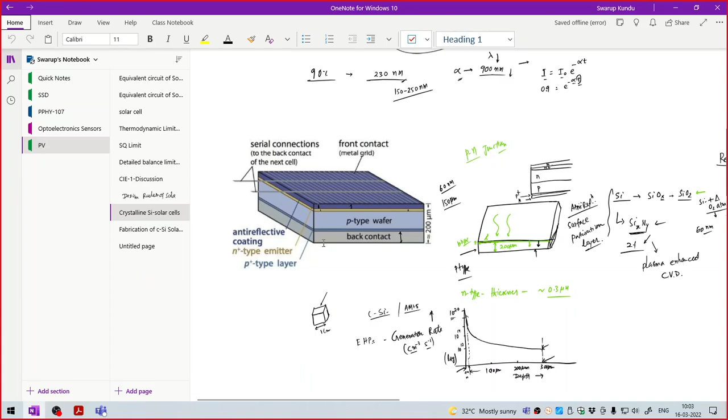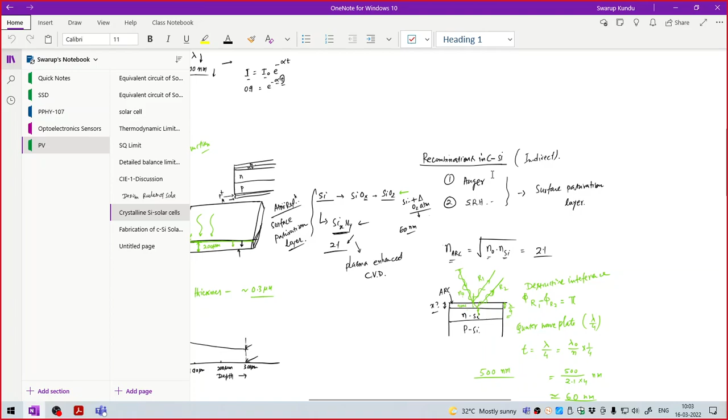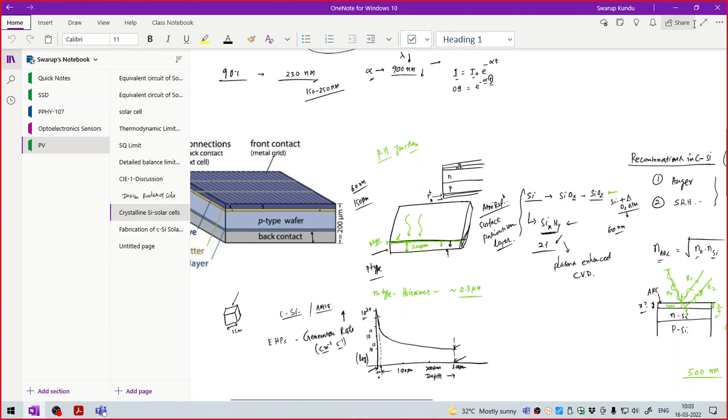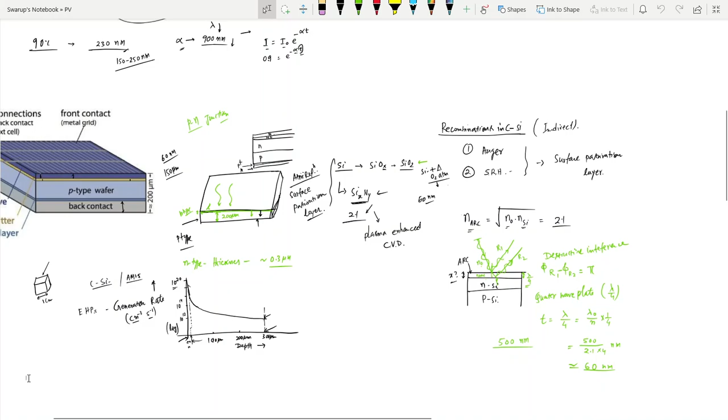In the last session, we discussed this crystalline silicon solar cell, and several concepts to increase its efficiency. We stopped at discussing the anti-reflection coating thickness and how to reduce recombination losses. We discussed this anti-reflection coating on the top, and we can use the silicon oxide layer or silicon nitride, either one for anti-reflection coating as well as surface passivation layer on the front surface. So for the front layer, until this we could optimize why we are doping N plus and the purpose of anti-reflection coatings.

Now how do we put the electrode? We discussed this earlier, but we'll quickly brush through once again what should be the optimum thickness of these bus bars and the finger bars, or the fingers. This thin metal grid. There are two types of metal grids: one is the thick bars called bus bar, which connects to the external circuit, and these fingers which collect the electrons from the wafer and send them to the bus bar. This configuration is used to minimize the shading loss.

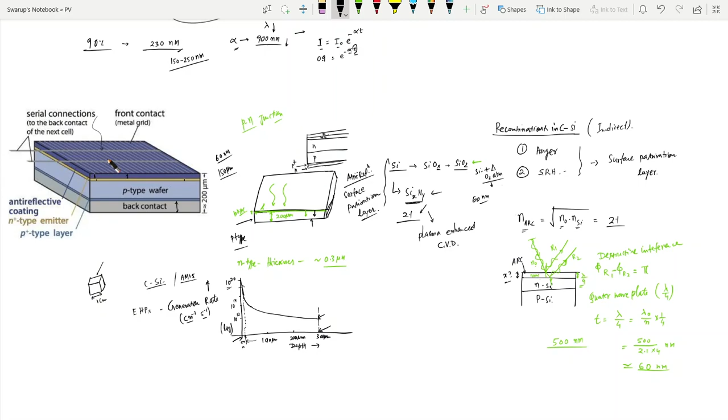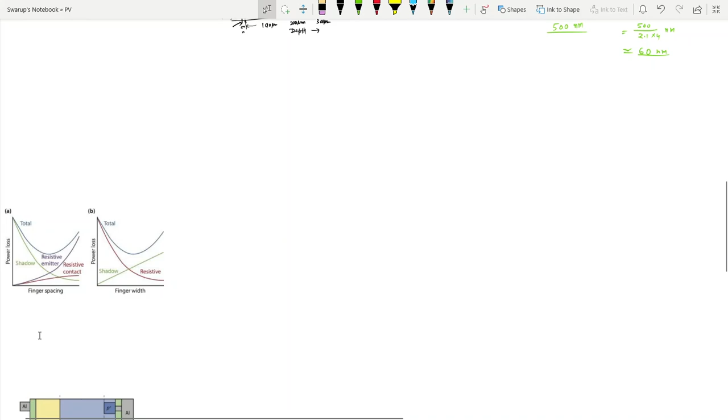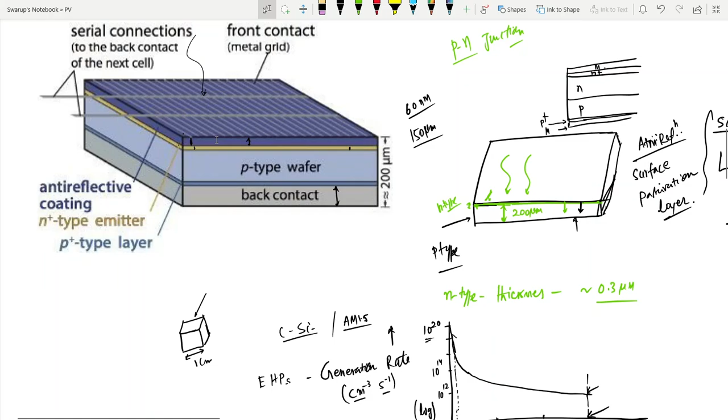Because light has to enter into the cell from this surface, the front surface, let's see this diagram. So on this front surface, there is a trade-off between the thickness of these contacts, these metal contacts or grids.

Sometimes we call the thin one the finger electrode, or fingers, and the thick one the bus bar. So there's a trade-off between the thickness of these fingers or bus bar and the shading. If you increase the finger thickness too much, we'll have a lot of shading loss, and the sunlight cannot enter. So there is a trade-off between these two.

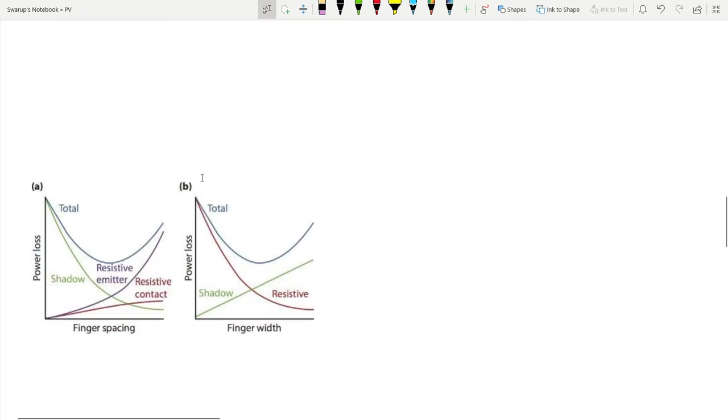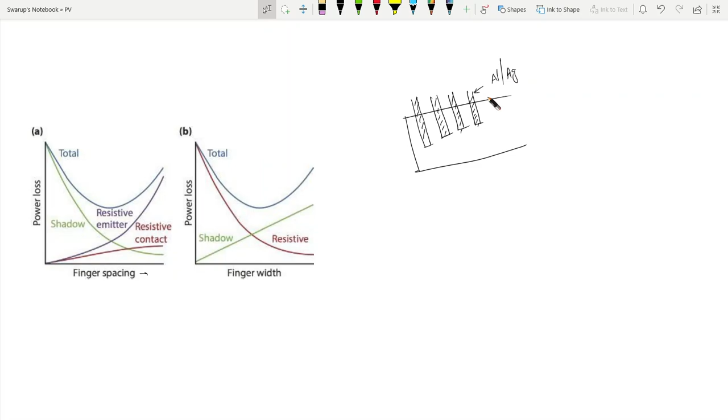Let's try to understand first the finger spacing. I'll draw the top surface of the solar cell, and I'll draw a couple of fingers to understand this. So first thing is finger spacing. These fingers are essentially made with thin metal films, generally aluminum or silver, and they are opaque to the sunlight, so they will shade the sunlight. There will be shading, so sunlight cannot enter into this region, and that's a loss for us since those photons will be lost.

So for finger spacing D, if we increase this finger spacing, our shading loss will decrease, since more sunlight can enter. In this curve we have the power loss, and shading loss is decreasing because we are increasing D. But the contact resistance with the emitter will behave differently.

This top layer is our N type, also known as the emitter. So the resistance between this emitter and the metal contact will increase, because if you increase the finger spacing, the number of fingers will be less, or the contact area between this N-type emitter and the metal will reduce. We know resistance R equals rho into L by area. So as we increase the finger spacing, the contact area reduces, and eventually our resistance will increase.

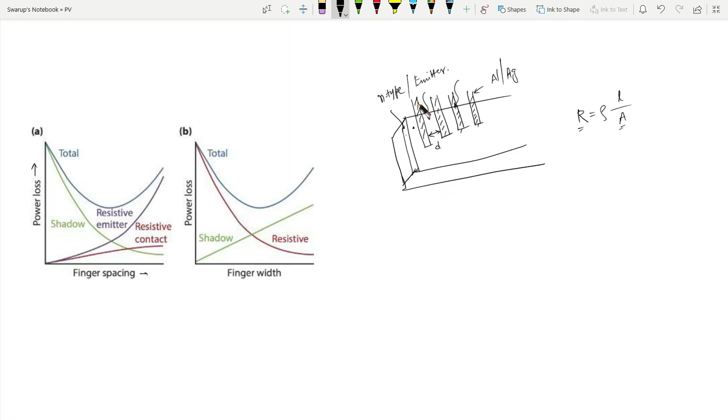And one more thing: if you go for very thin fingers, then also... but let's finish this point first, and the next one will come.

So if you increase the finger spacing, the contact area between this emitter and the metal is reducing. So if you increase D, the contact area decreases, so the R increases, and we'll have a very resistive contact. This line indicates the resistive emitter, that is the emitter resistance is increasing, and because of that the overall power loss is increasing. So we are losing more and more carriers, or overall the electrical power and efficiency will reduce.

The contact resistance is increasing, as you can see in this curve. If contact resistance increases, this resistance falls in series with the solar cell equivalent circuit, which we have seen before. Now when we try to operate the solar cell, there will be a voltage drop in the series resistance, which gives us lower VOC, lower output, lower efficiency. There is a trade-off between these two.

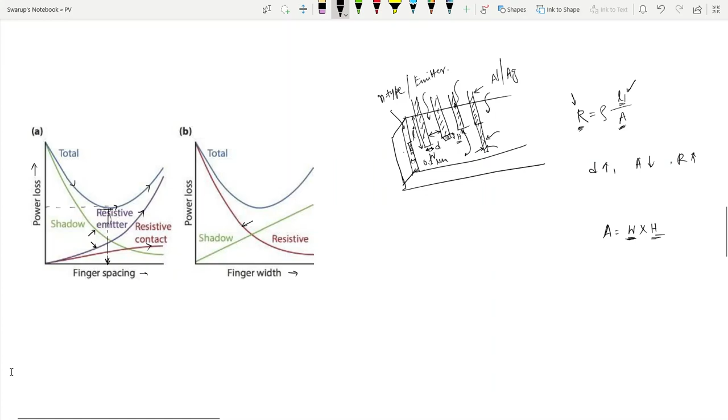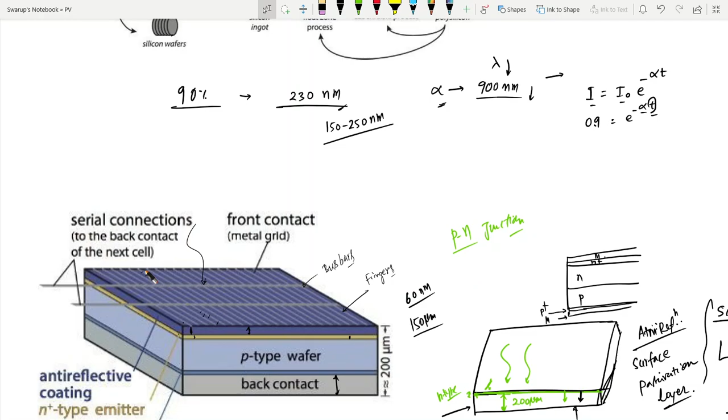So this L also you cannot play with much, and if you see this L, it is spaced throughout the solar cell, because we need to collect the electrons from everywhere, all the places. So it has to be that way, L we cannot play with.

So what is happening here? If you increase the finger width, of course resistance is decreasing, so this loss is reducing, but shadow is increasing. So if you combine these two, there is an optimum condition here, and we can get the optimum finger width somewhere here.

So in design perspective, these two numbers are very important. Later we'll see how we draw these or make these contacts, or how we pattern these electrodes on the top. Usually we use the screen printing technique.

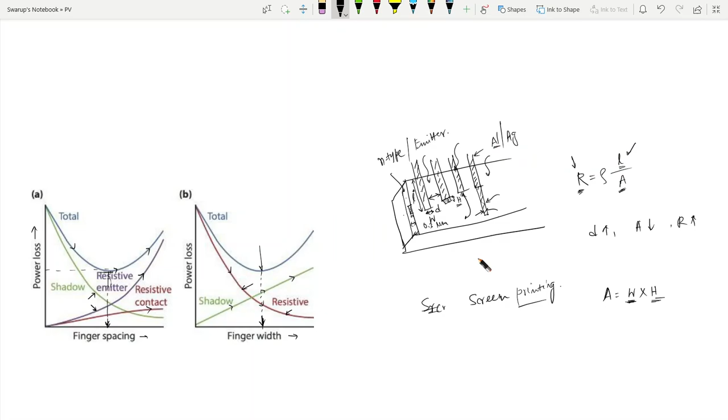Screen printing technique. So we use silver paste or aluminum paste and then do a screen printing. I'll come to more details about it later on. This is a much cheaper way.

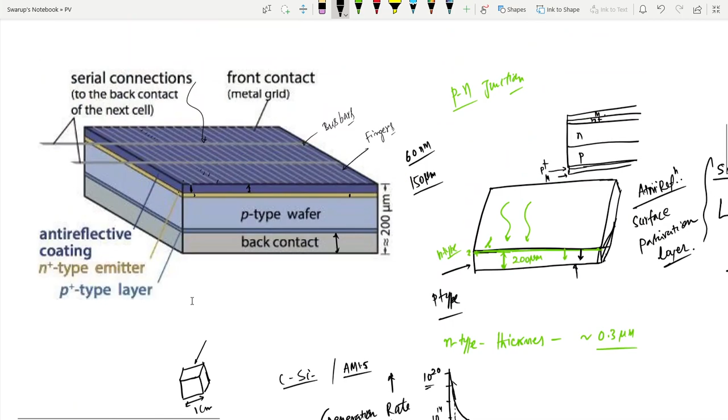So we have optimized the front contact. Now what about the back contact? In the back contact, we can have similar issues like the front contact, but one problem is not there, this shading and all. For the back contact, it doesn't matter.

We can cover the full back surface with metal, but the problem would be the interface between the metal and the semiconductor. This interface could be full of defects, because there is a sudden change in the lattice structure or periodicity, so there will definitely be defects.

So to reduce that defect recombination, if there is an interface between the metal and semiconductor, we can have SRH recombination there, because of the defects present when we change the material from semiconductor to metal. There will be a lot of dangling bonds present, or different dislocations.

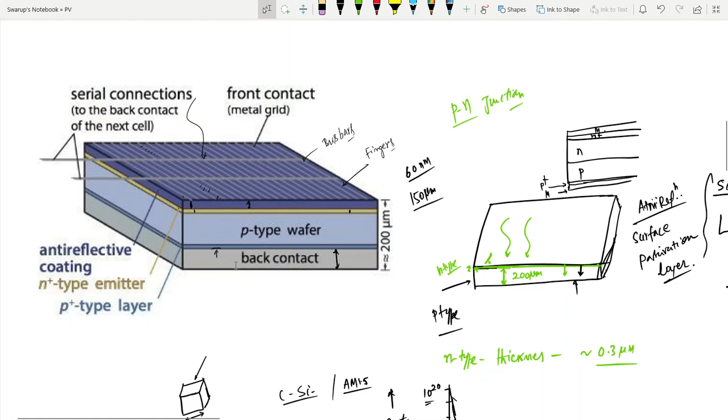So to reduce this SRH recombination, instead of having a continuous back contact, we can have point contacts. Let's say this is the back surface we are drawing. So instead of covering the whole back, we can have dots like this.

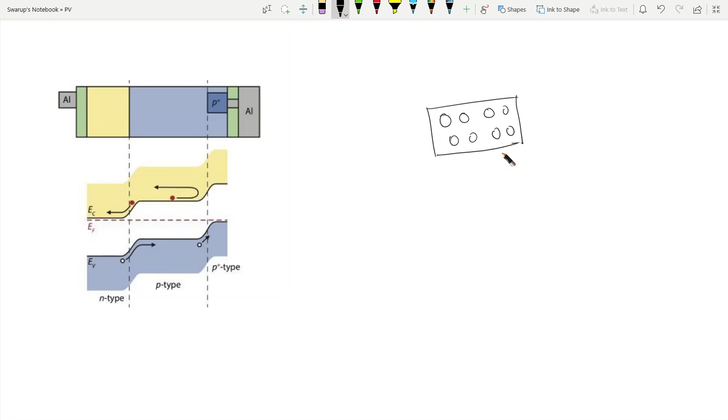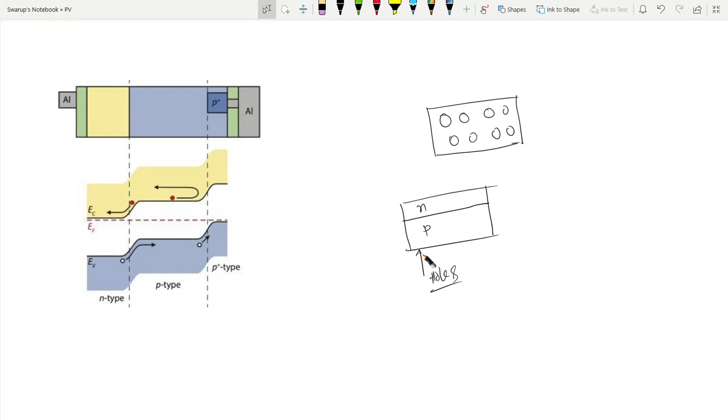So why do you need the back contacts? First of all, we need to collect the holes in the back of the solar cell. Quick drawing: this is N, this is P. In the back surface, we have to collect the holes. Now the holes cannot enter into the metal because in the metal the only carrier is electrons.

So whatever electrons get collected in this N type will flow through the external circuit and come to the back electrode here. This electron will reach here, and then the holes which are photogenerated should recombine with this electron only in the metal-semiconductor interface. Then the circuit completes, so we get an external current, and the photogenerated holes recombine with the photogenerated electron at this interface.

Now there is one problem: this hole can recombine with the electron present in the p-type semiconductor instead. In p-type semiconductor, we have minority electrons. Though they are minority, there are still some electrons, and these photogenerated holes can recombine with them, which we don't want. If they recombine this way, these electrons are not essentially taking part, so there will not be any flow in the external circuit.

So only the photogenerated holes should recombine with the photogenerated electrons which are coming through the external circuit. To enable this process, what we can do is put one p-plus layer. Let me explain this diagram.

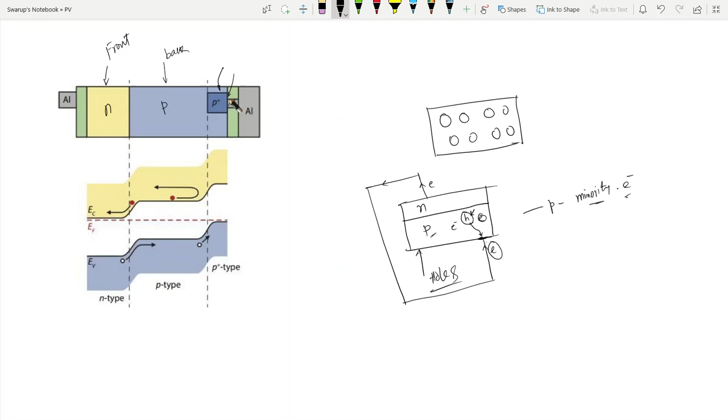So here we have n type semiconductor, this is the front surface, and this is p type, this is the back surface. What we are doing is using point contacts. This is the back electrode, but with the semiconductor the contact area is small, so we are using point contacts.

And one more thing, this green region is the surface passivation layer, to reduce all the recombinations at the surface. Now this aluminum metal, you can see it is coming until here, so it is touching the semiconductor only in this region.

So when we put this aluminum contact and co-fire it, as we heat it, some of the aluminum actually diffuses into this p type. So this side automatically becomes p-plus.

Aluminum, if it enters into a semiconductor, being trivalent, it will become p plus. So this p plus is fabricated while making the solar cell itself.

Now if you see the band diagram, you will understand this concept. We have n type semiconductor, p type, and p plus. You can see in between, this junction is very important. We have a p and p plus junction here, and this is how the band structure looks.

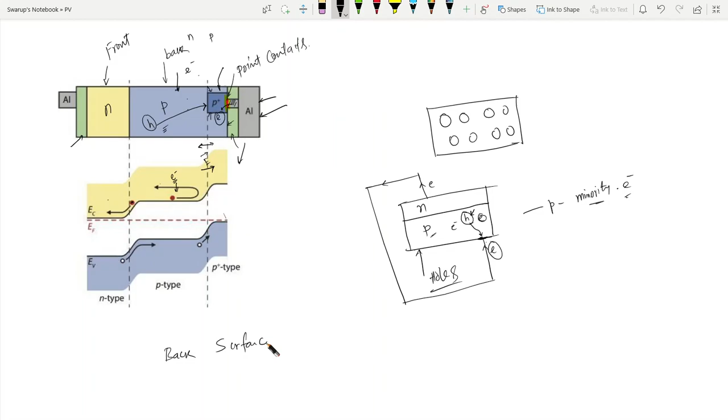So this kind of field is called back surface field. This back surface field is produced because of the doping concentration, one is P, one is P plus. So we have a back surface field at this interface.

So we could separate these minority electrons from the electrons coming from the metal contact, which is collected by the emitter layer, from the emitter layer on the front contact. This concept is very important. Hope you understood this concept. So this is how we make the back contacts for the solar cell.

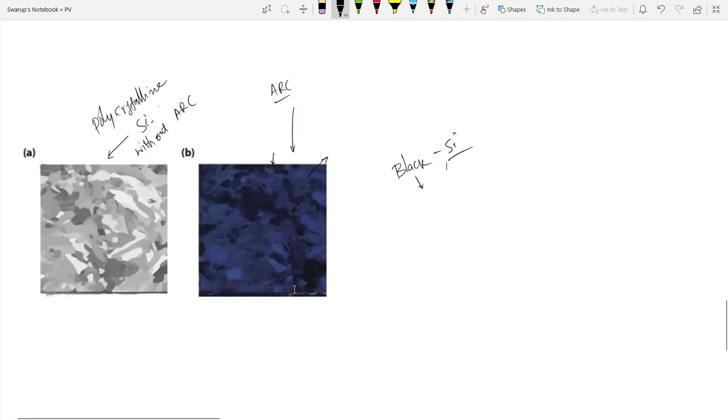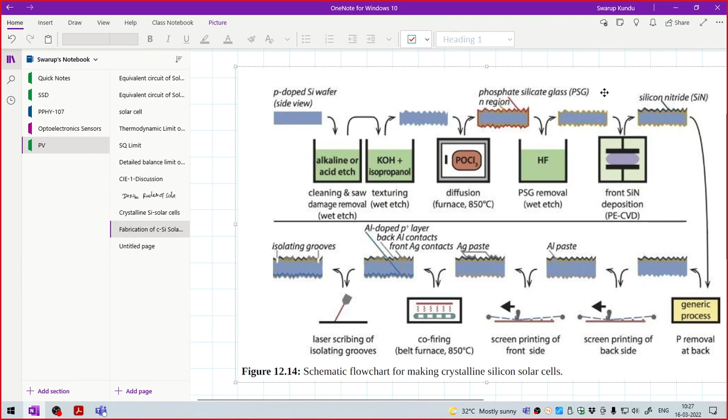Okay, so we'll move now to the fabrication of silicon solar cell, or crystalline silicon solar cell, how we make this crystalline silicon solar cell. I've taken this diagram from our reference book, Arno Smets. Now we'll just understand the steps.

So we studied that to start with, when we grow the single crystal, whether it is Czochralski or float zone technique, we dope the silicon wafer with p-type. So to start with, we have a p-doped silicon wafer. These silicon wafers come out from the Czochralski technique, and then we saw it off. We get a big cylindrical ingot like this, and then we slice it, and this is just one piece of this slice. Now, while slicing, this is generally done with a wire saw.

If you see any silicon wafer making video, you can see multiple fine thin wires rotating in a loop, driven by a motor. You put the ingot here, and keep pushing it up, so as the wire moves, it keeps sawing it off.

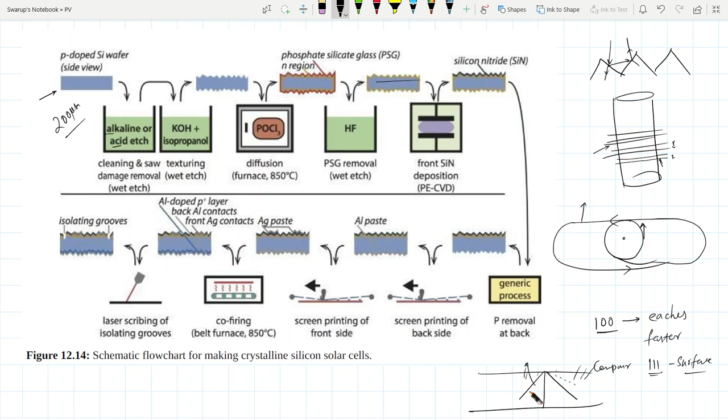So the 1-0-0 surfaces get etched off. Earlier it was a plane surface, and this material got etched off because it falls in the 1-0-0 plane, but finally the 1-1-1 surface is left. So we get this kind of surface structuring after this wet etch - we get the pyramid structure here.

Now we have to make the N layer. We have a P-type, P-doped wafer, and now we are making the N layer. To do this, we have to dope it with phosphorus, which is pentavalent - it's an N-type dopant. For the source of phosphorus we use POCl3, which is phosphoryl chloride.

Phosphoryl chloride, POCl3.

This phosphoryl chloride we use in a high temperature furnace, at 850 degrees centigrade. If you pass this phosphoryl chloride as a vapor, it diffuses into the bare surface, and the phosphorus present in this composition will diffuse inside. Depending on the time we give in the furnace, we can control the thickness of this N layer, which is very critical. We need roughly 0.3 micrometer diffusion length.

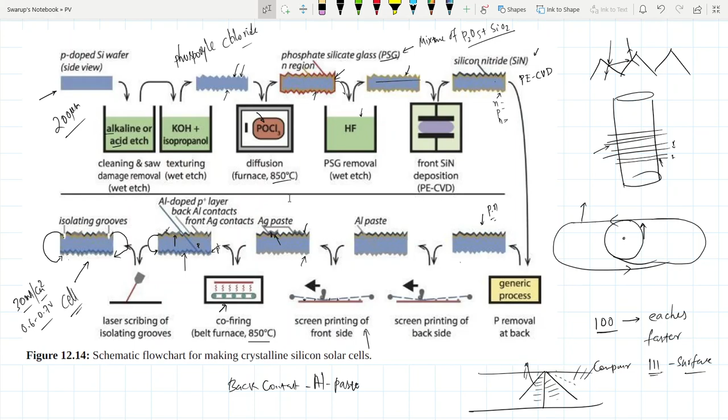Now, the next topic is a few high efficiency concepts. It's not going. Got stuck. Okay, anyway, it will take some more time also.